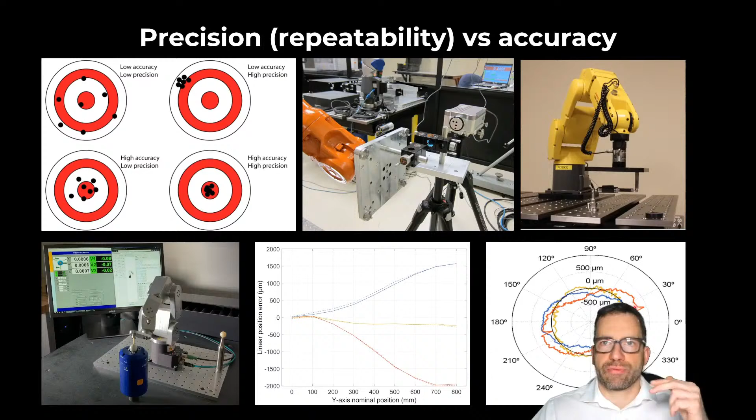So that's accuracy. Or in this case, we measure the distance between two balls with a Renishaw telescoping ball bar. And you can see then if you make a circle of 100 millimeters of radius, you can have up to 0.4 millimeters of deviation, plus or minus, from this 100 millimeter specified radius.

Now, who really needs precision? Very, very high precision, like a few micrometers precision? Well, anyone who needs repeatability of less than 0.5 millimeters.

Because as we'll see, it's not because the manufacturer tells you that your Meca 500 has a repeatability of 5 micrometers that it means whatever you do with your robot, it will repeat 5 micrometers. No, because if you have plastic fingers, if you put the robot on some flimsy base, it will not repeat within 5 micrometers, of course.

And then also, even if you machine your fingers, if these fingers are not exactly aligned, they will not repeat. The fingers themselves, the gripper itself, it's not 5 micrometers.

So keep in mind that when the manufacturer says it's 5 micrometers, this is kind of an ideal case. In practice, as we'll see, it can be worse than 5 micrometers. So don't tell yourself, oh, the Meca 500 is overkill, I don't need 5 micrometers. You need 5 micrometers because you have different kinds of errors.

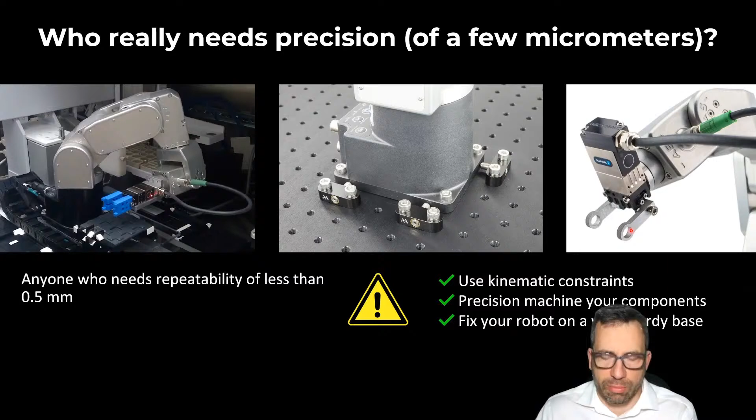Now, who needs accuracy? Not everybody needs accuracy, because basically you definitely need accuracy for some applications. For example, for inspection. You cannot have a 3D scanner. I've had people come to my lab and they think that because their scanner is super accurate, they can just put it on a robot and then the robot can scan something and everything will be within the accuracy of the scanner.

No, because the robot tells you it's here and then it's here, but there is a big error. It's up to 1 millimeter error. So even though your scanner is super accurate, when you try to construct the whole 3D model, it's not accurate, right?

Material removal, if you do machining, if you do deburring, finishing, whatever, but if you use a CAD model, and then from this CAD model you offline program the robot, well, you need accuracy. Maybe you don't need 5 micrometers of accuracy, but you definitely need a robot that is calibrated. If you have too many features, you can always teach one by one, but it's way too long.

Teaching, fine-tuning, it's possible, but it's super long. Like if you have a tray with 10 by 10 parts to teach, yeah, of course you can teach them, but if you have an accurate robot, then you can just teach 3 positions and interpolate between them. So you save time. So sometimes to save time, sometimes there's no other way.

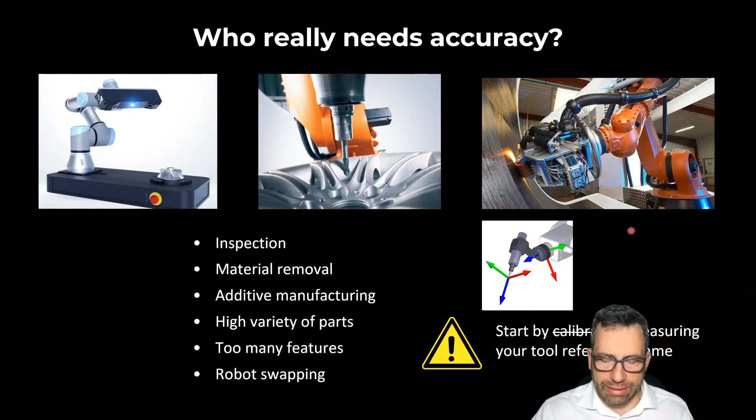So sometimes it's really difficult to measure the tool. It's a camera, it's a 3D scanner. So how do you measure the coordinates of a 3D scanner or a camera? Sometimes you can measure it on a CMM. Sometimes you have to identify it or calibrate it. But that's very, very, very important.

Now, what do we have as metrology tools in robotics? In robotics, we can use almost any kind of metrology tool that is usually made for machine tools, which are generally much more accurate than robots.

So you can use a telescoping ball bar. It's a fairly inexpensive tool, very, very easy to use, a Bluetooth device. You can use laser interferometer systems from Renishaw. You can use a CMM, which is good for small robots. For big ones, they don't have those huge CMMs that you would need for a big robot.

You can use a laser tracker, of course, especially for big robots. For ours, it's not that accurate, but you can use a laser tracker. We've used laser trackers. You can use this kind of device, which measures the XYZ position of a ball, a special ball - it's basically called the R-test device. Or you can use a cheaper version of that device, which is made of 3 digital indicators mounted on a fixture in an orthogonal manner. This is something I designed at ÉTS.

You can use optical trackers, which are good because they measure in real time the XYZ coordinates and even the orientation of different objects, but they're not that accurate, especially for small robots as ours.

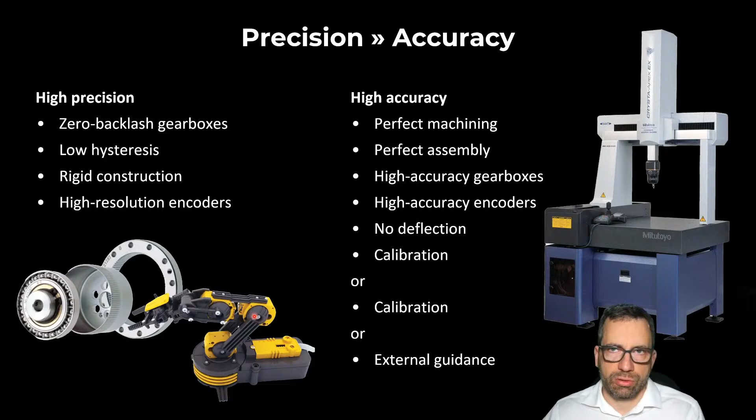Or, as in the case of robots, if somebody needs accuracy, we take the normal robots that we usually ship without calibration and we do the calibration to make them more accurate. We'll talk about what this calibration is, but basically it's a measurement process plus some mathematics, and then the robot is more accurate. Or the best scenario is to use external guidance, like a laser tracker or some other metrology tool, but then of course it's super expensive.

So, precision - there is a norm that prescribes how precision must be measured, so that from one manufacturer to the other we all use the same method. That makes it easy to compare results.

This norm basically tells us we have to visit 5 different points within a diagonal plane of a cube, following a pattern - 1, 2, 3, 4, 5 - and repeat this 30 times. There's a given formula we use that takes into account the standard deviation and so on. So it's quite normalized, but there are still open questions: do we use the maximum payload or not? What is the TCP, the tool center point? What kind of tool do we use for the measurement - a laser tracker, an optical tracker, or a CMM? What is the orientation of the end effector? Do we warm up or not? So even with a norm, there's still uncertainty if one manufacturer does it this way and another does it that way.

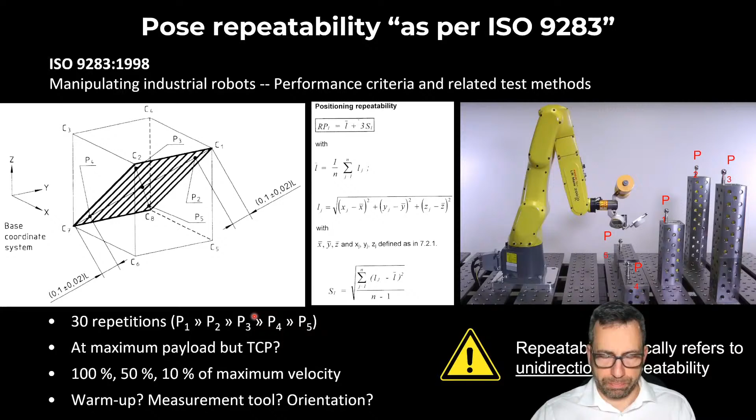But in all cases, repeatability typically refers to unidirectional repeatability - we always come from the same direction to the point where we measure the XYZ coordinates.

How do we measure repeatability in industry? Well, almost always, except in our case, we use a laser tracker, because it's quite accurate, especially for big robots - pretty accurate, very easy to use. You can automate everything, and it's contactless. So it's really the best device for larger robots.

But it's not accurate enough for robots like ours, because even if you don't move the reflector - the spherically mounted reflector with 3 mirrors where the laser is shot - even if you just move the laser tracker away and come back, you'll still have perhaps 5 micrometers of error, even though the ball hasn't moved. So you cannot use a laser tracker to measure repeatability in the range of 5 micrometers - it's not accurate enough.

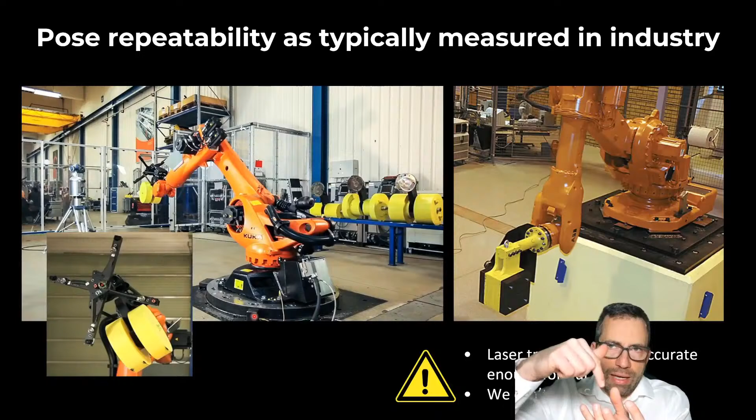And since you can't use a laser tracker, you have to use this kind of device where the only way to measure is coming from one direction - you can't come sideways - and you can only have one device, since you can't afford 5 of them because they are very expensive.

So this makes it impossible to use the ISO norm. But the beautiful thing about repeatability is that even if you don't use the exact tests prescribed by ISO, as long as you use their formulas and measure it here or here, it's pretty much the same. Repeatability is quite the same as long as you don't measure it in some perfect location, whatever that is.

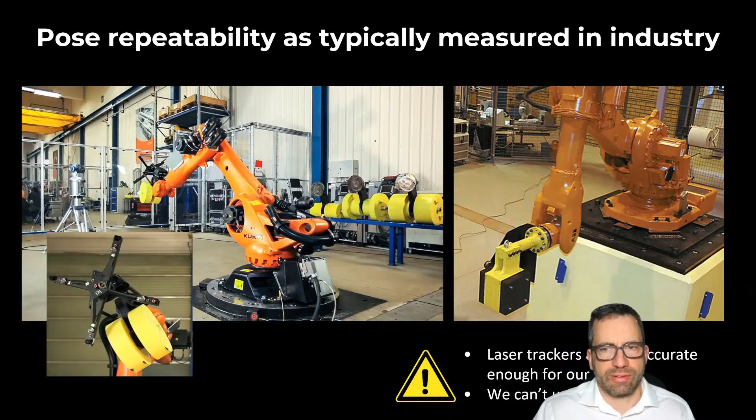So it's kind of difficult to cheat if you want. Even if you don't use the norm, as long as you use 30 repetitions and use the same formulas, it gives pretty much the same results. As you can see here, all these 5 points are very, very different. One is here, one here, here, here, and here.

We don't use the exact norm for this measurement that I made in my lab, because you're supposed to go from P1 to P2 in a straight line. But with this kind of device, you cannot. You have to retreat and then come to P2 and approach P2. But even with this way, we kind of get the same results as the ones specified by the manufacturer.

Now, what matters and what you should understand, and this is why I was telling you that it's not because the robot has 10 micrometers of repeatability, or 5 in our case, that it will always be this way. Here is the demonstration. When you do this test, you come once and then 30 times, but it's always in the same direction, same speed, everything is the same.

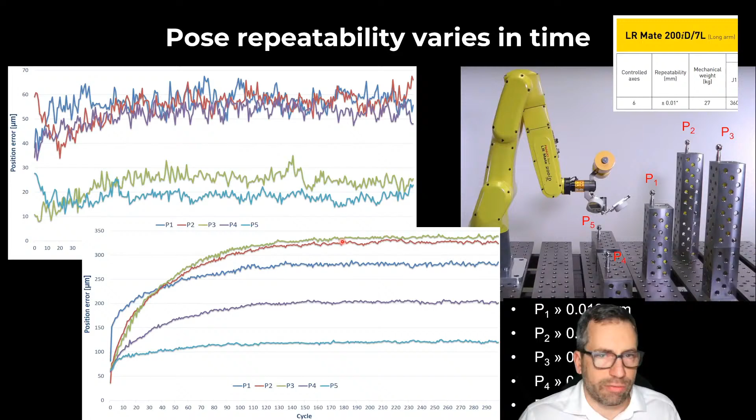It's not. Now, this is about accuracy. This is about repeatability. Now, what's accuracy? We saw what's accuracy, but why are robots not accurate? Well, because when we manufacture them, the distances between the axes, the angles, they're not perfect.

During the machining, during the assembly, when we insert the gears or the bearings, from one robot to the other, there are always small errors. And these errors accumulate, and then the actual robot is different from the perfect robot, which is modeled in the controller of the robot.

There is a test of how to measure accuracy in the ISO norm, but that's not good, because accuracy, unlike repeatability, is kind of random, especially after calibration. So the only way to catch the actual accuracy of a robot is to do as many measurements as possible, because if you only measure in 1, 2, or 3 spots, you can be lucky and the error can be very small.

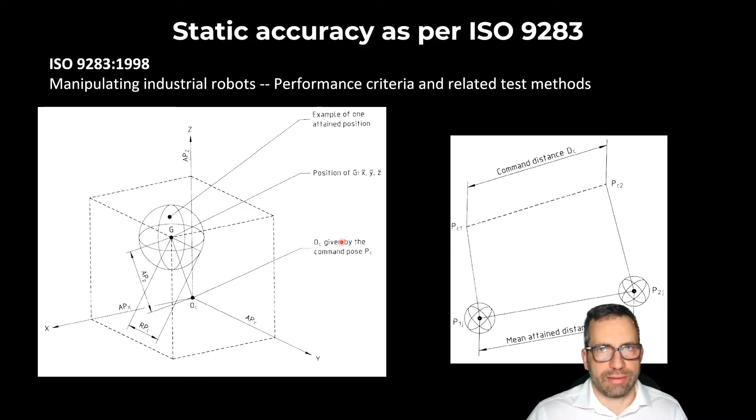But if you measure it 7,000 times, you will see that the data is quite different. So fortunately, nobody uses this norm, and manufacturers will basically validate the accuracy in 20, 30, 38, or 100 different random, maybe not completely random, but kind of almost random configurations. This is the way manufacturers measure the accuracy of the robot.

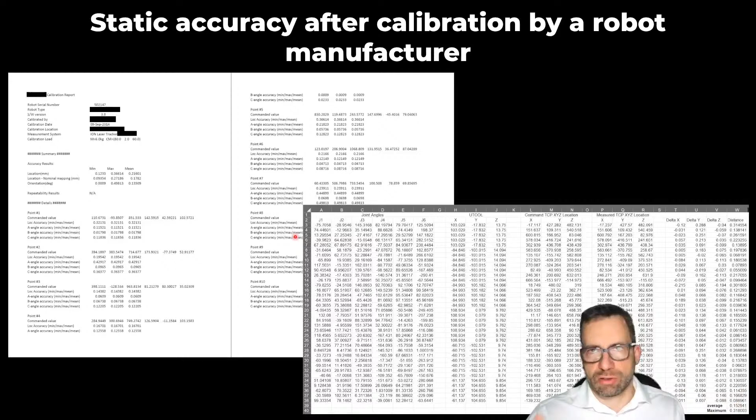For CMM machines and machine tools, we have a very good norm for measuring accuracy. For robots, the specification for measuring accuracy is not good, so there's no way to compare from one manufacturer to another. That's one thing, and also it depends on how many measurements you do.

Like when you're in a lab, like me, your students have 3 years to complete their PhD, they have plenty of time, so they will take thousands of measurements with the laser tracker. And this is what it looks like if you take many measurements.

So it's not like repeatability. Again, repeatability, if you measure here or here, it's pretty much the same. Accuracy is very, very different. It's kind of random. You cannot say, especially after calibration, that the robot is more accurate here than here. It's kind of random.

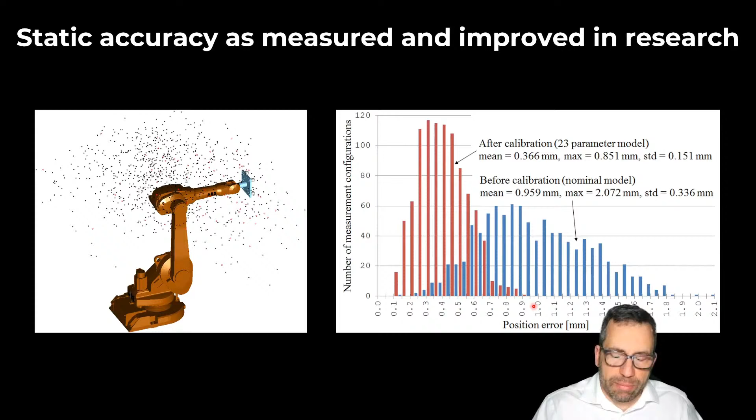So what is calibration? Calibration is basically developing a more sophisticated model. It can be the same model, but usually more sophisticated - some distances which were considered to be zero are now no longer considered zero, and because of this the model becomes more difficult. The inverse kinematics is more difficult, and so on. We can even consider that the stiffness of the joints, instead of being perfect, is now kind of flexible - the joints are flexible, so we have to identify the flexibility.

And then we do lots of measurements of the end effector's position and orientation, using a laser tracker or some other tool - in our case a CMM machine, because it's much more accurate than a laser tracker, and our robot is very small, so why use a laser tracker? By the way, a CMM is even more affordable than a laser tracker, so it makes no sense to use one in our case.

And then you run optimization methods and try to find the values of the parameters of your model that make the errors in the position and orientation, where you did your measurements, smaller. So you have no guarantee that the errors will be smaller in random robot configurations, but if they're smaller in these 100 or 50 measurements, we expect they'll be smaller elsewhere as well. So this set of parameters that you've identified is called the robot signature.

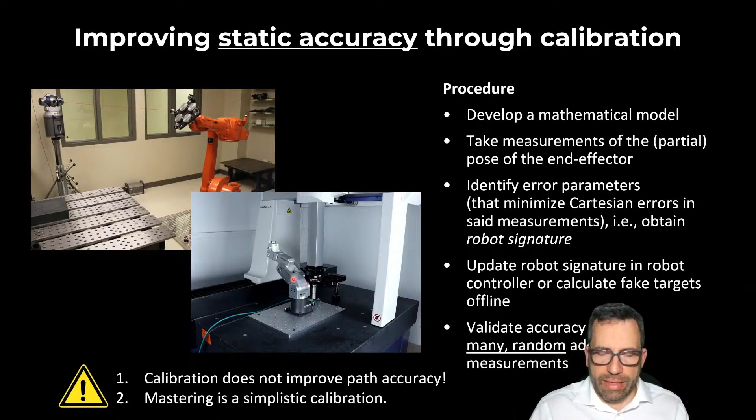Calibration does not improve path accuracy. When you do a move L, like a move line trajectory between two poses, continuous movement, this movement will not be better than before. It's the final destination that will be reached with more accuracy, but during the movement itself we will not use the new sophisticated model, because otherwise it will take too much calculation power. It's possible, but we don't do it, nobody does it. By the way, mastering is kind of a simplistic calibration where we identify only the offsets of the actuated joints.

So we talked about taking measurements. How many of them? If you calibrate your robots at a manufacturer, they will give you maybe 50 or 36 measures. So the mean value is quite good, an estimate, standard deviation as well. But of course, don't expect that the maximum will not be worse, because if you do 7,000 measurements - well in this case it's our own calibration, not exactly the same as Fanuc did on our robot - but if you do our own calibration, the mean value is even better than what the manufacturer states. The standard deviation is a little bit worse, but then the maximum is worse too, because you have very few, but you still have pose configurations where the error is up to 0.9 millimeters.

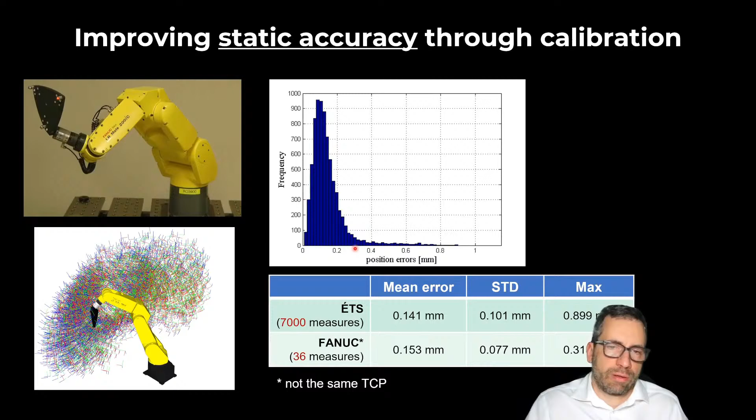Most of them are less than 0.3, but there is no guarantee that sometimes it won't be 0.8. So this is something you should know. Even though the manufacturer, like in our case Mecademic, will tell you the maximum is 0.2 after calibration, we have no guarantee. If we take 1,000 measurements, maybe sometimes it will be 0.5 millimeters. But in most of the cases, it will be much better than 0.2 millimeters. So there is no guarantee, but generally it will be better.

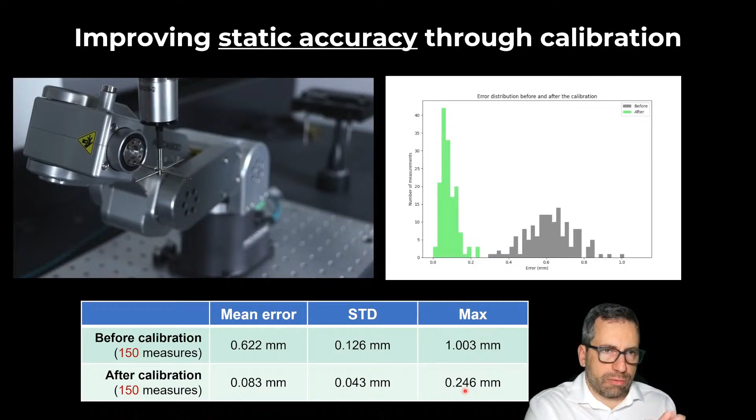So accuracy, calibration - you cannot blindly rely on this, but it's the best you can expect. There is nothing better than calibration. So if you are swapping the robot, maybe you need to fine tune the program a little bit. If you are doing something else, maybe you still need to do the fine tuning, but this fine tuning will be much less than in the case of a non-calibrated robot. So for sure with calibration you win. It's not perfect, but you definitely win with respect to a non-calibrated robot.

Now, we talked about calibration being done at the manufacturer. This is the best because it's kind of transparent for the user. But you can also use a third party, like RoboDK, which was developed by a student of mine. RoboDK calibrates some of our robots, and they do a very, very good job. The only problem is that you have to use their software all the time, because the new model is not inside the controller of the robot, it's inside RoboDK or Dynalog or whatever software you use for the calibration.

So you need what is called post-processing. It's more expensive, especially if you do it only for one robot. Maybe if you do it for many, many robots, it's better to buy your own software and do it yourself. But then again, you have to buy a laser tracker, so it's almost never less expensive to do it yourself.

But it's more flexible, because let's say you have a very special tool - you can use the exact tool you use, whereas we, the manufacturer, use no tool or always the same tool, and we cannot easily adapt our process for your very specific application, where instead of a soldering tool, you have a camera or something else. So that's the disadvantage of doing the calibration at a manufacturer - it's kind of a generic solution. But if you have a very particular case where, let's say, you don't move everywhere, you only move in a small volume, then maybe if you only have one robot to calibrate, maybe we will not do it.

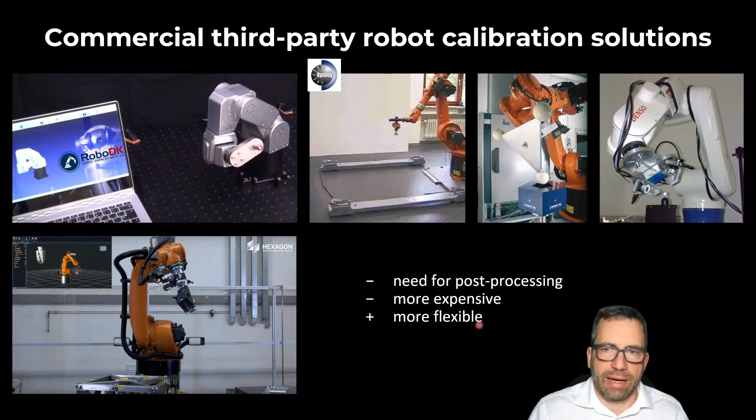The manufacturer will not do it, because they are set up for this kind of process. If you want a very different process, it will have to be customized. The best accuracy is achieved when you use, well, not the best, but much better, secondary absolute encoders, but you cannot use secondary absolute encoders on small robots. This is only for very big robots.

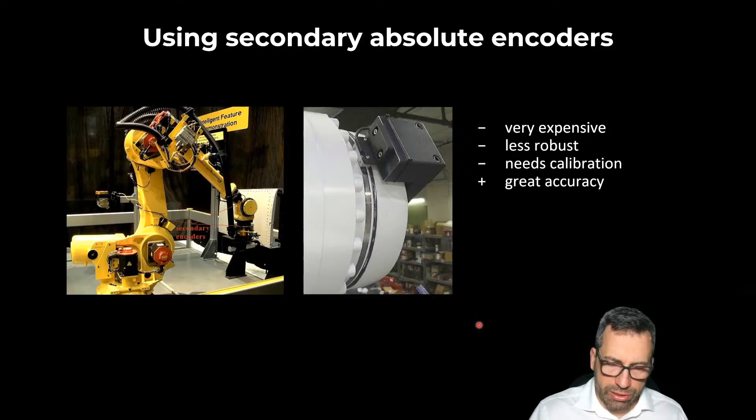And even if you use absolute encoders, you still need calibration. But the best case scenario is when you use external metrology equipment. For big robots, that's great because you can use optical trackers, laser trackers. But for small robots like ours, you cannot use it. So the only way to improve small robots is through calibration.

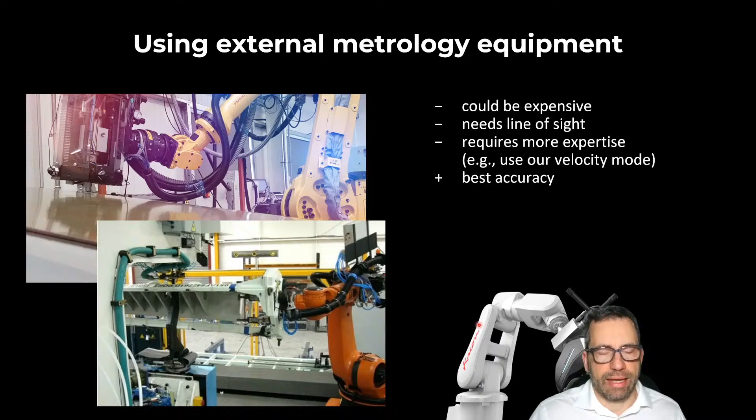So thank you, thank you very much. I hope you got some kind of introduction into calibration, accuracy, and precision. And if you have any questions, I will be happy to answer them. Thank you.